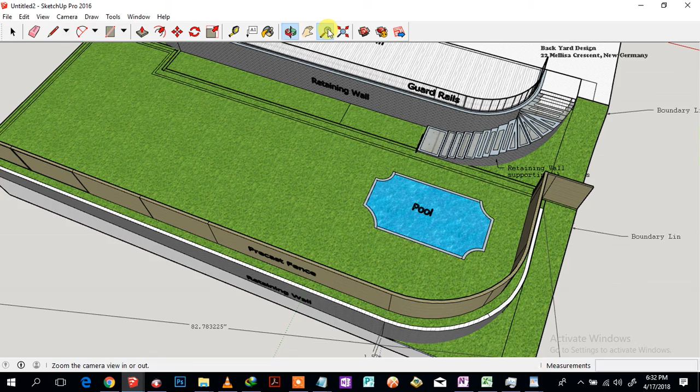I've been working on the drawings as I've been telling you. I just decided to give you an update because I'm still working on it, but I'm almost through. Okay, to start with, we have a sloped ground in the backyard.

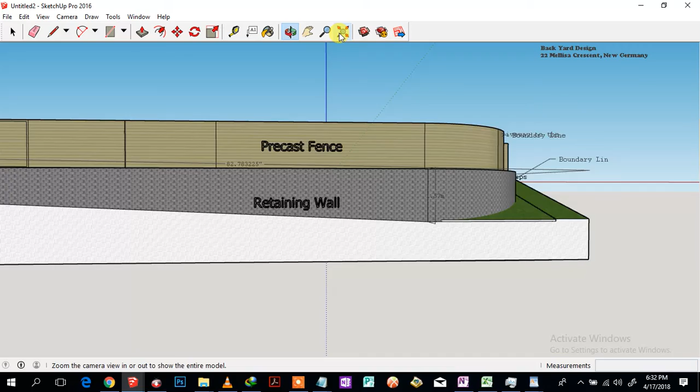So we're gonna have to start by demolishing the existing fence, or you could do that, and then later at a certain stage we could build the wall. But the most important thing I've addressed in this drawing is the wall - that's how it's gonna look like after we've successfully built it.

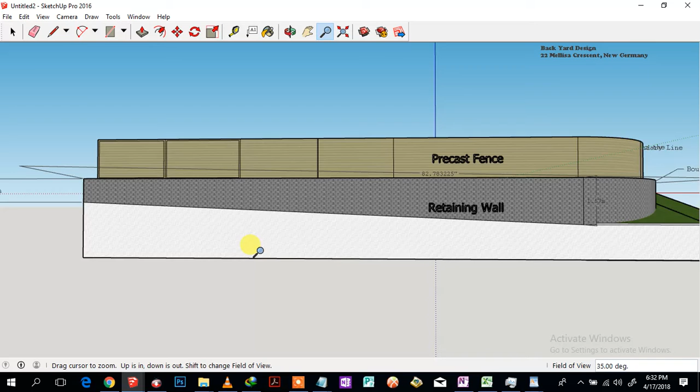So I also considered the slope of the ground. It has the lowest and highest point. So I think the looks of the wall have been addressed with this drawing.

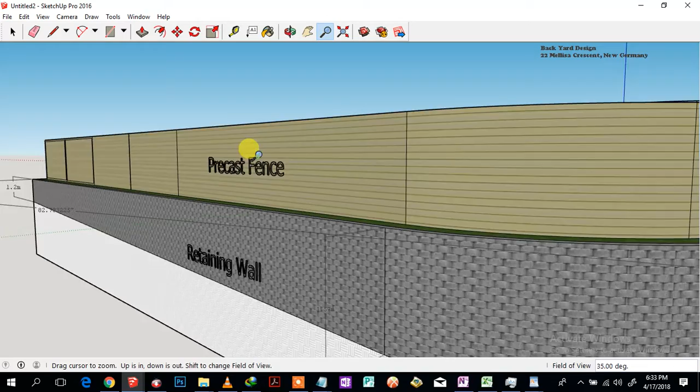And then secondly, you probably have to build up a precast fence above the wall, as you wished. This precast fence you probably gonna have to put up is for security, right? It's just for illustrative purposes - it's not exactly how it's gonna look like 100% when we've actually built up the wall for security.

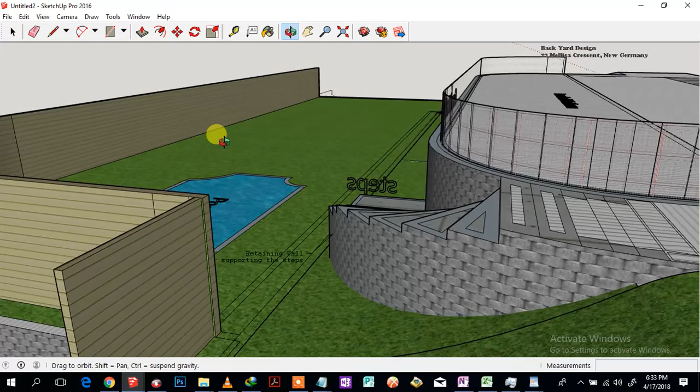I mean this fence is up, right? And the most important thing I've tried to put together is the design of the other wall, because you wish to extend the flat platform from here to have a wider space from the house, because I think the existing slope is pretty close to the house. So then we're gonna need to build up a wall, but it will be a massive one.

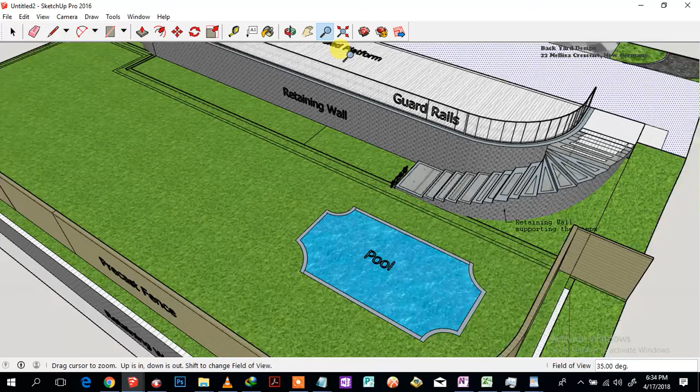It will be 4 meters high with the whole length, right? So then the most important thing I came up with was the location of the steps. So instead of putting them in the center like I did in the other drawing, like how this drawing looks.

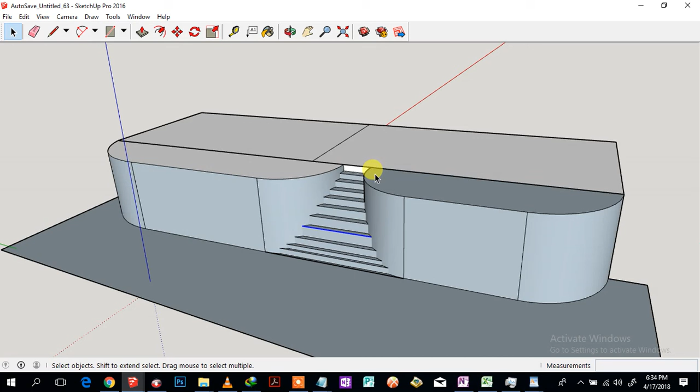Instead of actually putting them in the center, we could put them on the far end here. We put them here, and we walk down, and you get to the pool, easily accessing the backyard.

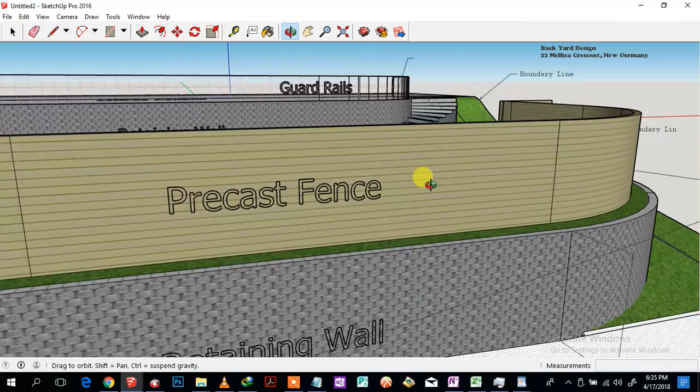Okay, so if you look at this ground, we've leveled it up. So we're gonna require a lot of this ground where the pool is. At the moment it's sloped, so we're gonna have to get a lot of sand to fill up - there's gonna be a lot.

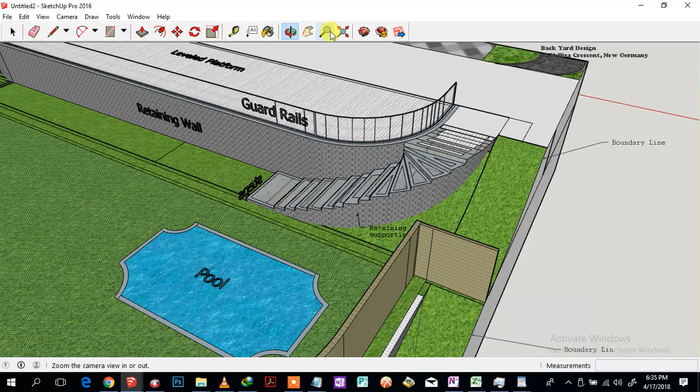I will actually put that in the specification, the more detailed format I'm working on, the quantity of sand we're gonna have to get when the project starts. Anyway, I'm trying to bring this closer so you can have a look at how it's gonna look like after the walls are built up.

But anyway, it's not like you have to go with this - if you don't like this idea, we can still put it in the center. Your priorities, your considerations and your preferences are the most important.

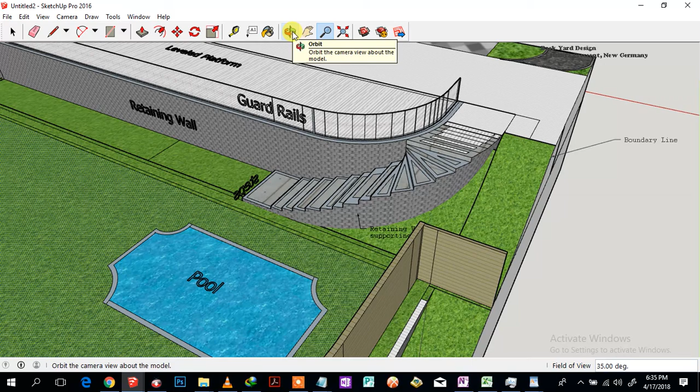Okay, so you probably have noticed I've put some guardrails with the drawing as well. When you consider building up this wall, you might as well consider you need to come up with a budget for these guardrail systems, the safety systems, because this wall is going to be massively high, 4 meters.

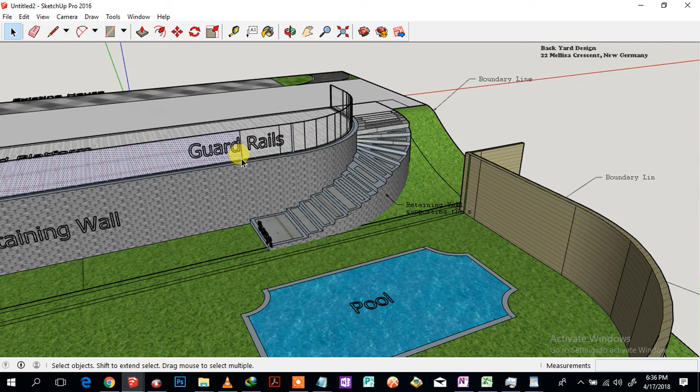This is what I'm talking about, it's going to be 4 meters. So there has to be some sort of safety system to avoid accidents, because if there isn't anything here, it's risky that we might drive over or fall off the wall. To avoid that, we have to put some safety systems.

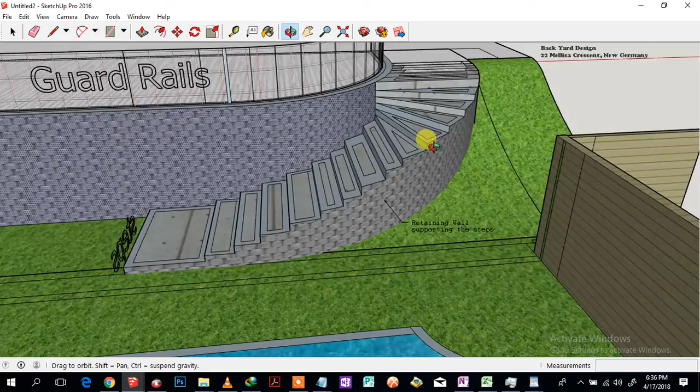Okay right, yeah, so I'm done with this corner. Now I'm going to the other corner - it's actually where you wish the driveway constructed, so you could also access this part of the platform with vehicles.

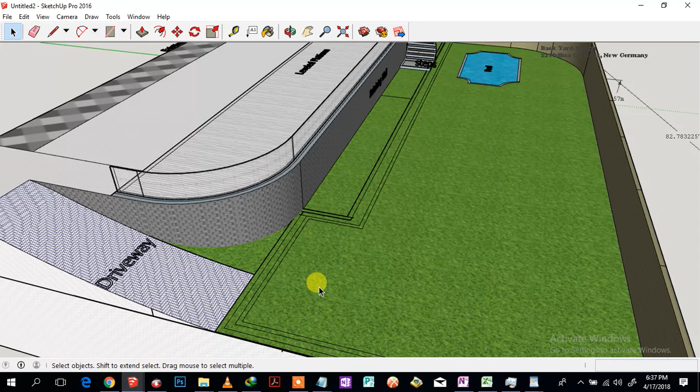Yeah, the driveway there is wider, it's wide, there is enough space and it can be constructed. It's not going to be very steep - the ground is actually not too steep on this part. So there will be enough space to build up and have vehicles access this part that is going to be leveled, right?

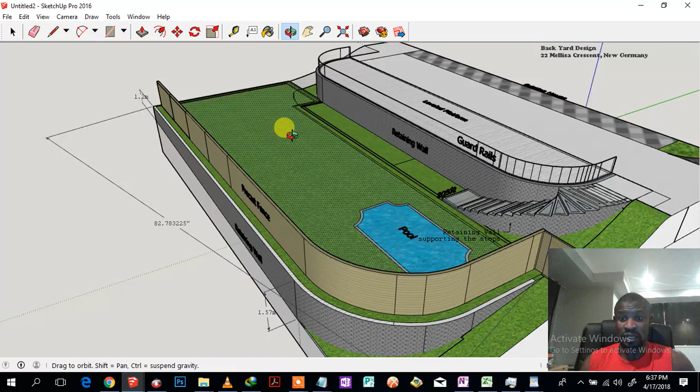So yeah, this is what I wanted you to have a look at. As I said, I'm working on the detailed proposal - all these will be labeled nicely with explanations, the right decimal dimensions, and also the quantities of all the materials that are gonna be needed.

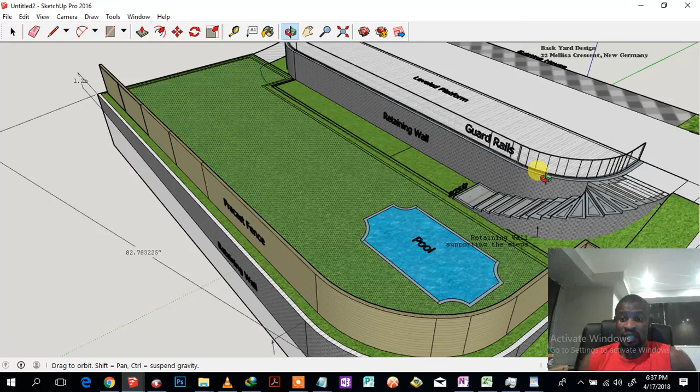Because just in case you don't go with us, you'll have a framework, a platform whereby you can weigh things out, that you can use as a basis for guidance if you decide to go with another construction company.